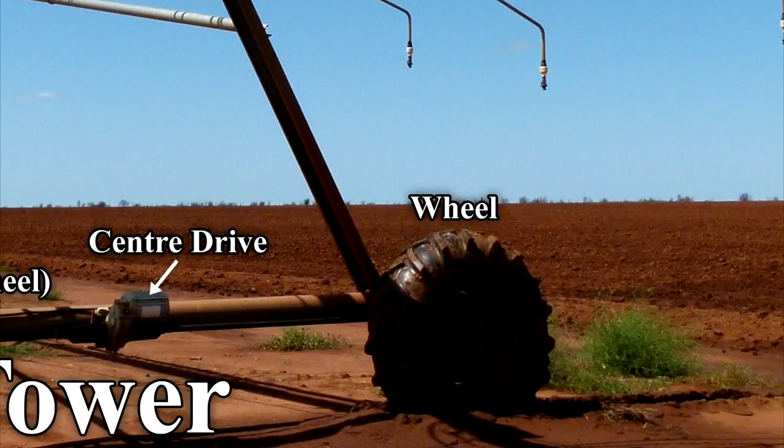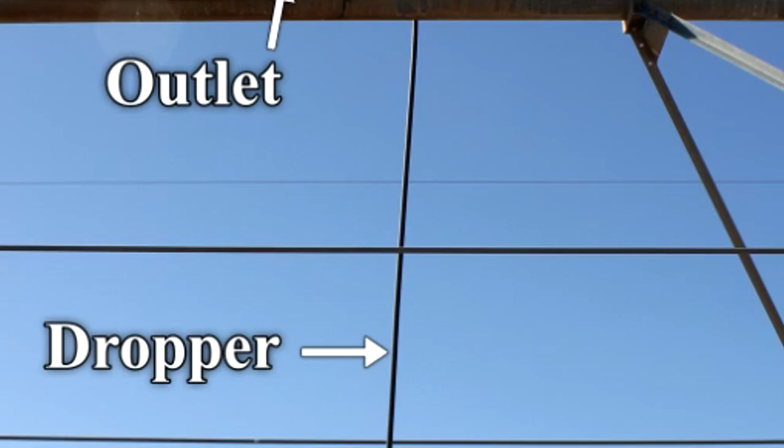The tower contains gearboxes, drive wheels and the drive motor, either hydraulic or electric. Flexible mechanical or hydraulic couplings connect individual spans, with system alignment maintained by micro switches, alignment valves and control equipment. Outlets or sockets along each main pipe allow emitters to be attached, either directly or more commonly on rigid or flexible droppers.

We now introduce Pat Daly, an irrigation consultant from the Darling Downs, who will give a detailed explanation on the componentry of the centre pivot.

Basically, with a centre pivot system, as the name suggests, you've got a centre pivot tower, and these towers can be made up of towable towers or skid, both in a skid tow arrangement or a wheel tow arrangement, and they come in a four-wheel tow or two-wheel.

And with the pivots, generally they are fixed pivot towers, and they can be run on commercial power or generated power on site. The tower itself is made up of...

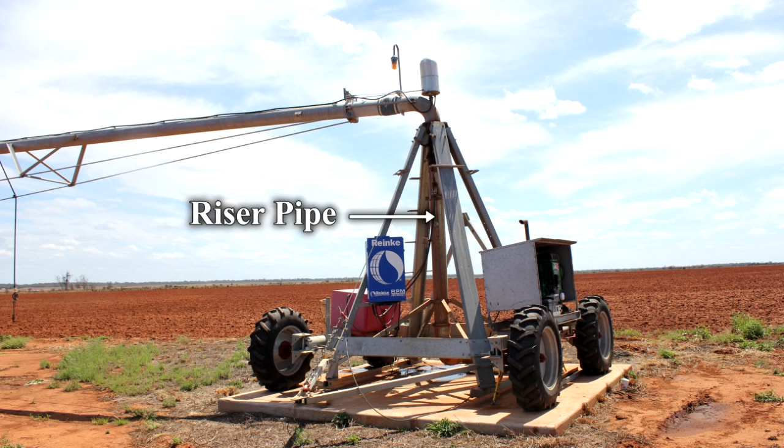Four legs generally, and it'll have a riser pipe that goes up the centre of the tower, which attaches to a pivot elbow. Through the centre of that riser pipe is what we call a J-pipe, which is really the conduit for the electrical cable to feed up through the inside of that pipe.

At the top of the elbow, we've got some of the start of the electrical components, which is a collector ring. The collector ring is the part where all the wires join into a circular box that only works on brushes and contacts. This allows the pivot to do a full circle without twisting all the wires.

Also attached to that pivot tower is the control panel. Control panels come in variable technology, like from the very basic machine where you can control the percentage that the outside tower is walking at, that's a percentage of the speed, down up to the very high-tech ones where you can vary the speeds and change the rate that it walks at various parts of the paddock.

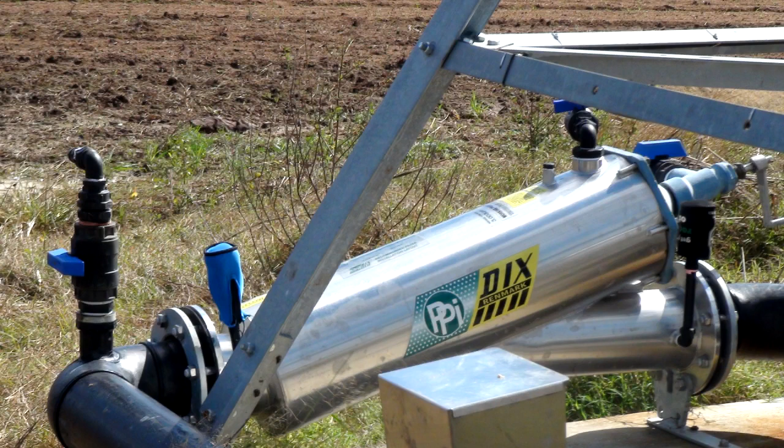The other component that you should have on a machine, particularly if it's using surface water, is a filter. The filter is best placed at the centre point. There's not very much point putting the filter back at the pump. The reason being, if there's anything in the pipe or there's any work that needs to go on with the pipe, you run the risk of putting dirt through the sprinklers.

All pivots, new pivots, are all getting filters put on them. We started off with very simple filters at the pivots or the pumps, and now we're going to a rotating filter that a man can just go up, and each of the filters have got a pressure gauge on the intake side and discharge side, and as soon as there's a differential you just have to wind the handle around a couple of times and drain it away.

The cost of your filters for us has been paid for in 12 months just on your labour. You save from having blocked jets or non-uniformity of distribution.

All of the pivots, we put the sand trap on the last tower, we lower that down to, with a piece of polypipe, down to just at the wheels, and we can crack a 2-inch plastic valve there and just drain that every time. And we also drop another drain at the very end of the overhang, so that we can drain the overhang out as well. And if you keep it clean out like that, you don't have a problem.

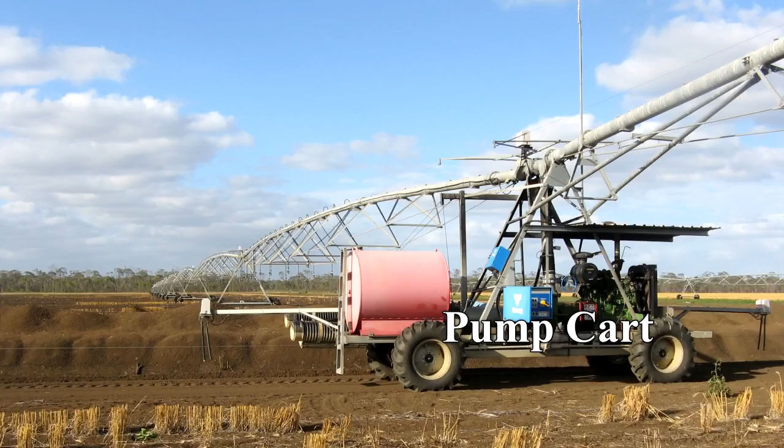A lateral move is used to irrigate rectangular fields. The main structure and components are a pump cart supplying water and power, self-supporting frame spans, each end of a span supported by a tower.

The tower contains gearboxes, drive wheels and the drive motor, either hydraulic or electric. Flexible mechanical or hydraulic couplings connect individual spans. System alignment is maintained by micro switches, alignment valves and control equipment. Outlets or sockets along each main pipe allow emitters to be attached, either directly or more commonly on rigid or flexible droppers.

We now introduce Pat Daly, a consultant from the Darling Downs, who will give a detailed explanation on the componentry of a lateral move. The lateral moves come in a couple of different configurations. You can get a 2-wheel cart or 4-wheel cart. It can drag a hose, a soft hose or a hard hose.

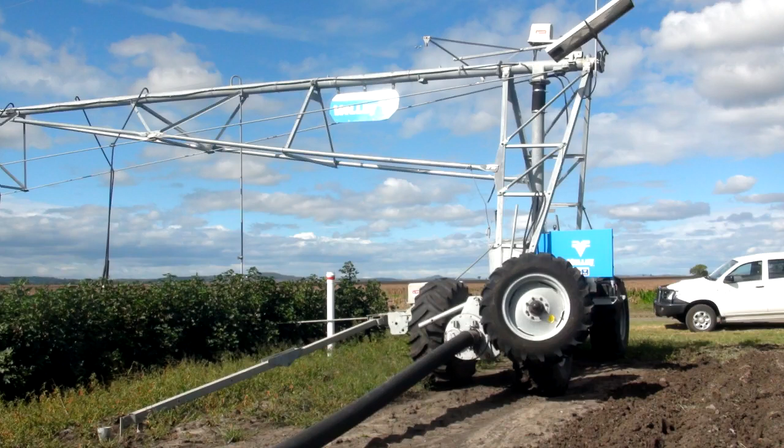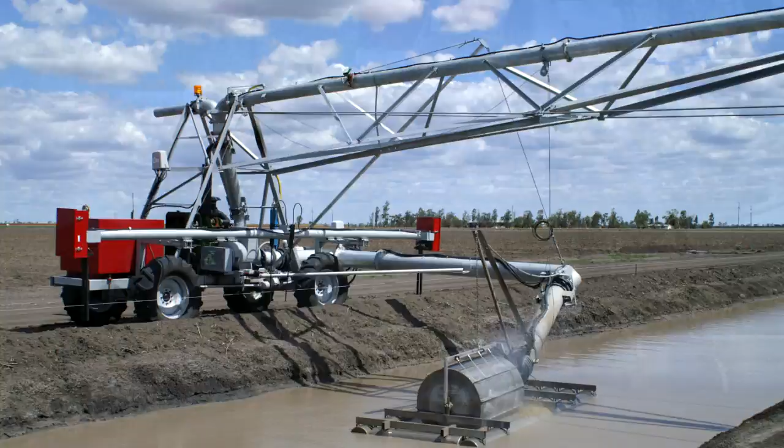The hard hose has the benefit of being able to pull more hose because it's got less resistance on the ground. There's also the ability for a ditch feed, where the machine draws water from a ditch. In these cases, the cart is mounted not only with an engine to generate power, but also to run a pump off one end of the engine that pumps water from the ditch.

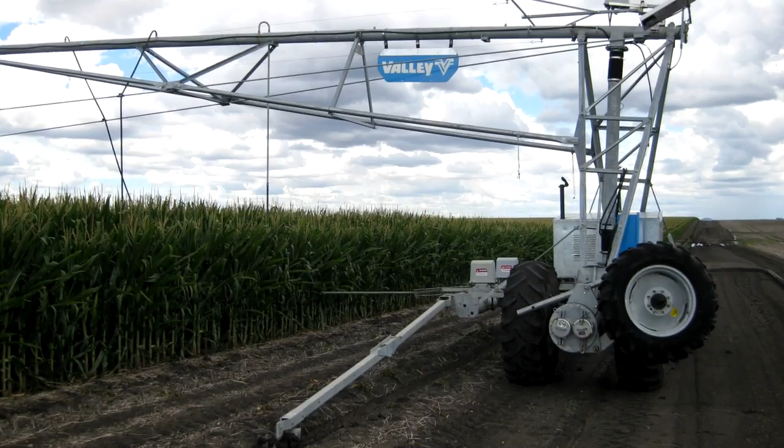The guidance systems in these cases can vary. You've got furrow guidance, which is basically a long arm in both the forward and reverse direction of the cart, which activates a micro switch to keep the cart square to the paddock that you're irrigating.

Or you can have a wire guidance. This is where you've got a wire just about 450 mil above ground level, and the arms do the same thing, with a micro switch in the forward and reverse direction to keep the cart square.

This is also particularly the case where you might have a pivoting lateral, sometimes referred to as a racetrack configuration. In this case, on the centre elbow you would have a proximity switch, which also helps keep the cart square with the rest of the machine when it's in lateral motion.

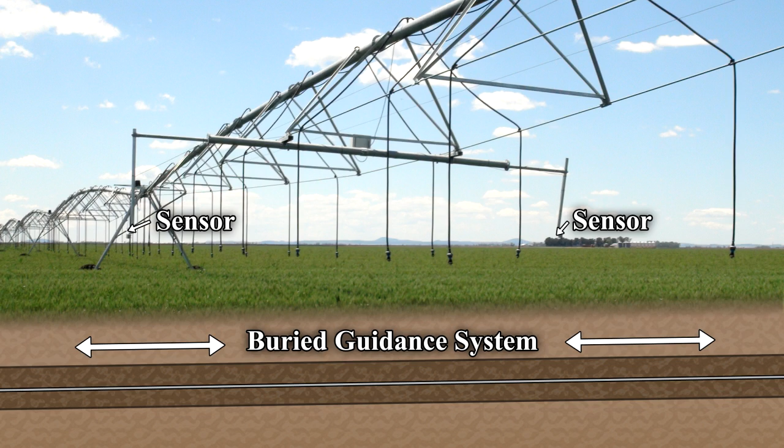The other guidance system is a buried wire, where a sensor picks up a wire buried beneath the ground. It works the same way, except the wire is all buried, and it's very sensitive to any change in direction. It's sometimes used where there are slight bends to overcome.

However, I wouldn't recommend it for that reason, because it can change the uniformity in the way that the water is applied.

The other way that's been used more often recently is GPS, where you've got a GPS reference of both the cart and the end tower. I'm not sure whether that's been used in a racetrack configuration, but if it hasn't been, I'm sure it's not far away.

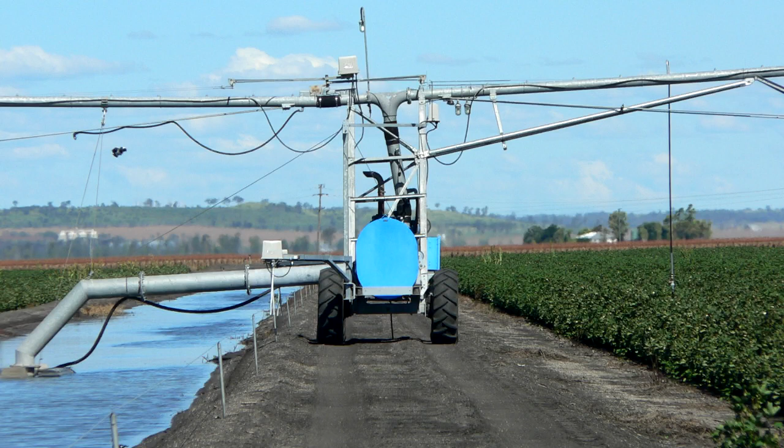By far the most intrusive to any farming operation is the wire guidance, because it's in the way of any farming activities that you might want to do across that laneway.

So we've gone for the underground wire guidance system, the same wire between both machines. The reason we went with it is because we wanted to just put it in the ground and forget about it. We'd seen other people's systems collapse over time, or on the side of the channel get flooded over, which was a bit of a concern.

We're also taken by the accuracy of the underground wire. I think we're very impressed with the accuracy we're getting. It's 700 under the ground.

It was a bit of a challenge to get it in. We had a trench put in with GPS, then we just put the tractor over the trench on a GPS line, had a rig, and laid it down. It was quite challenging because it was the very wet season when we put it in, but once it's in under the ground, we've been really happy with it. It's been great.

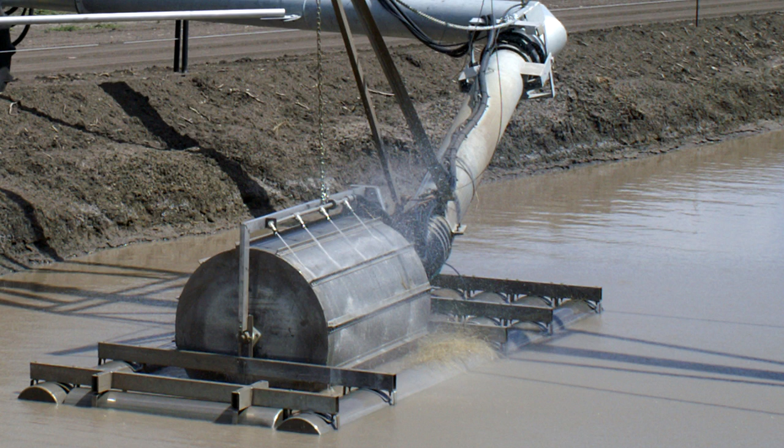The suction screens are generally set up so that you've got backflush water that can blow back across the screen to clean them, because there is a lot of trash, shells, frogs and fish and things that get in these drains and need to be cleaned off the screen.

However, they're not designed for that. The two ways that most times are used to prime the pumps on the carts is a vacuum pump, which, once the suction pipe is dropped in the water, will lift the water to the pump. Or alternatively, you can use an exhaust venturi, which causes a vacuum and lifts the water into the pump.

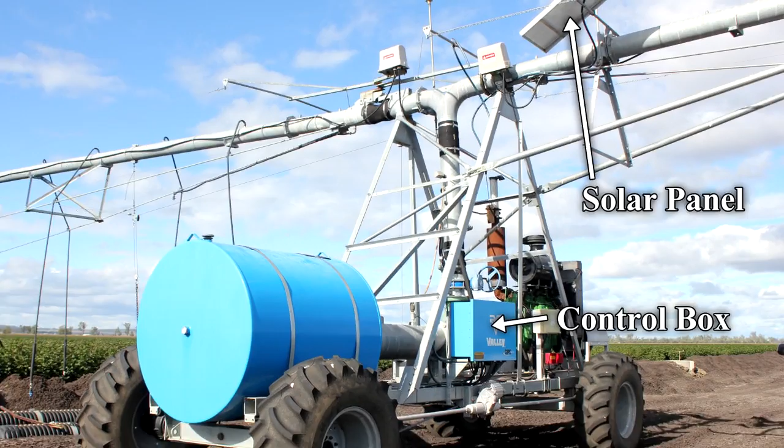The controls are generally all on the cart, and despite these being engine drive, they can be automated quite successfully. Generally they would have a solar panel to keep the control panel alive for any remote signals that it might get.

From the elbow there, the cable is run out onto the spans, and each of those spans are joined with a flexible joint. There's mainly two different types of joins that do this: a rubber boot, or you can get a split case coupling. Both of them are just there to seal the water, it's not anything structural to hold those spans.

Different brands have got a different way of joining those spans. We have a ball and socket type arrangement, which goes from the fixed pipe to the receiver. We've got some horizontal and vertical connections that allow free movement between the spans, but hold the receiver up to the stationary span.

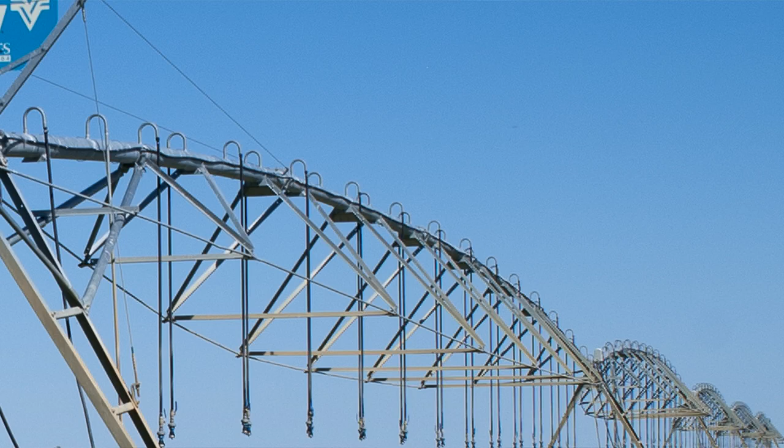Each of the spans are designed to take weight with a downwards pressure, and that's why if you see any of them, they've got a slight bow in the pipe, and they're all the structure underneath, which is the truss rods and V-jacks. The V-jacks are really the part that supports everything back to those truss rods and keeps the truss rods taut.

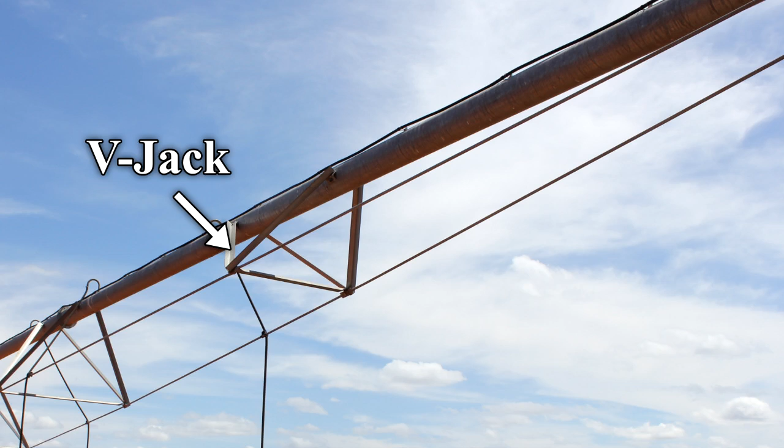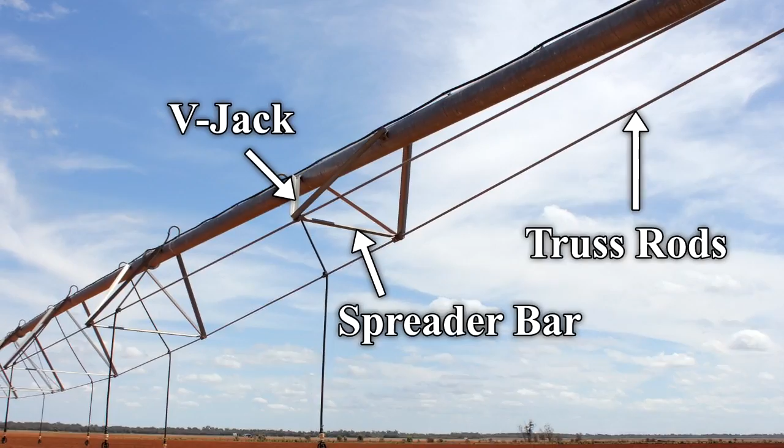Between those V-jacks we have a spreader bar that holds the V-jacks out into an angular configuration, which gives it more strength, not only with the downward pressure but also if there's any undulation that the spans might have to ride over.

At the end of each span there's a couple of different ways of attaching the legs to the base beams. There's a double leg arrangement, and there's also a couple of brands that use a single leg that comes off a gusset that's welded onto the end of the last pipe of the span.

Just on the spans, those spans are made up of short lengths of pipe which are bolted together with flange joints, with each flange joint having a V-jack and spreader bar to support it.

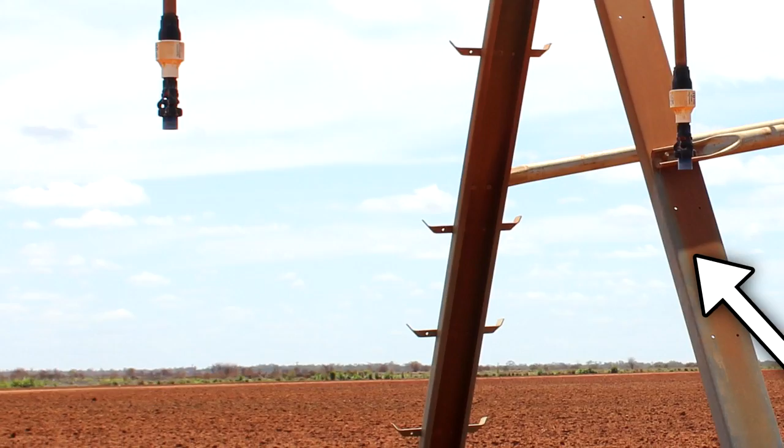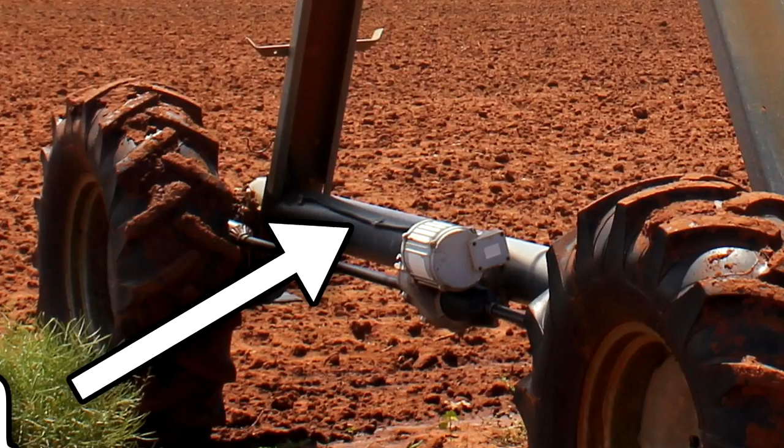But when it attaches the legs, the common thing with all of them is those legs are attached to what we call a base beam, and the base beam is really what carries all the drive train mechanism. So that's your centre drive in the case of an electric machine, and then your wheel gearboxes and wheels, drive shafts and couplings. With a hydraulic machine, of course, you don't have a centre drive.

You've just got wheel boxes that have got hydraulic motors on them. The other thing a little different with a hydraulic machine is that you will have hydraulic pipes that run from the centre point out to each of those wheels, and at each joint you will have a proportional valve, or a spool valve as it's commonly known, that will control the flow of oil to each of those motors to stop or control how much oil is going to the motors.

Obviously, the further out you get with a centre pivot, the faster the outside wheels have got to go, because it's got to travel further.

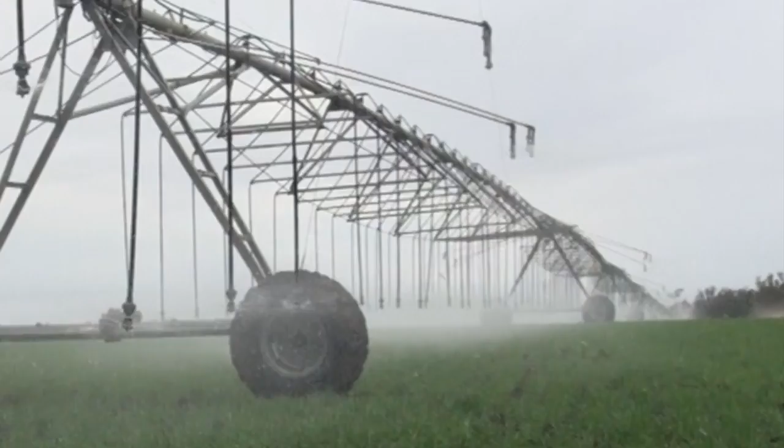With an electric machine, they work on a micro switch up on the tower, and really how this works is when the outside span gets out of alignment, it activates a switch, which then activates that set of wheels. The wheels will travel forward until the micro switch is switched off. There's a few different ways of doing that, but basically they're all using the same micro switch.

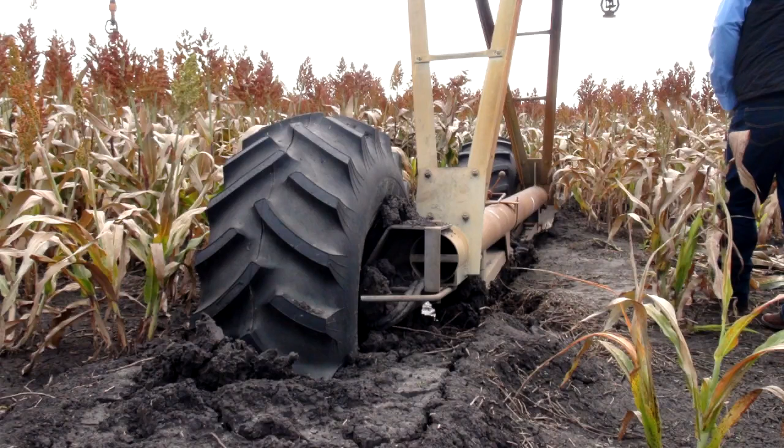They also have an override switch. If it gets out of alignment too far, that will shut the machine down. This could happen if you had a machine bogged at some stage and it can't keep up with the next tower, well, it'll stop the machine.

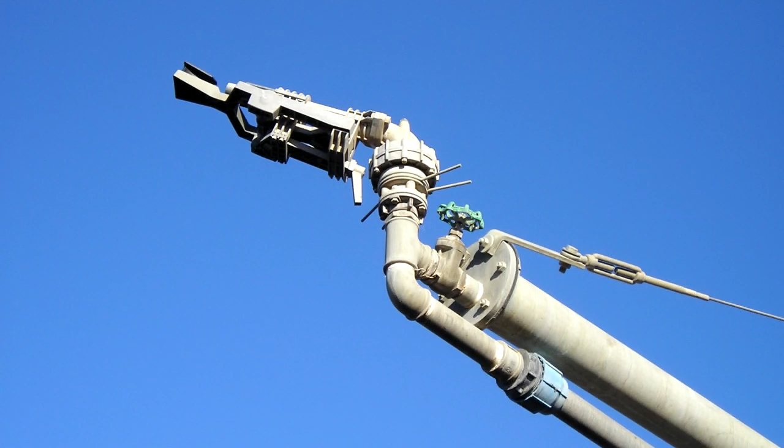The cable runs all the way from the collector ring right to the last set of wheels, and quite often if it does have an end gun on it, that cable will also supply power to a booster pump. The reason for the booster pump is that centre pivots are low pressure machines, and the end gun is a high pressure piece of equipment, so it needs to have the pressure boosted, and this pump is supplied out on the end tower to supply that end gun.

The end guns have a part circle function on them, and normally that's adjusted around the 210 degrees.

So that's done at commissioning generally.

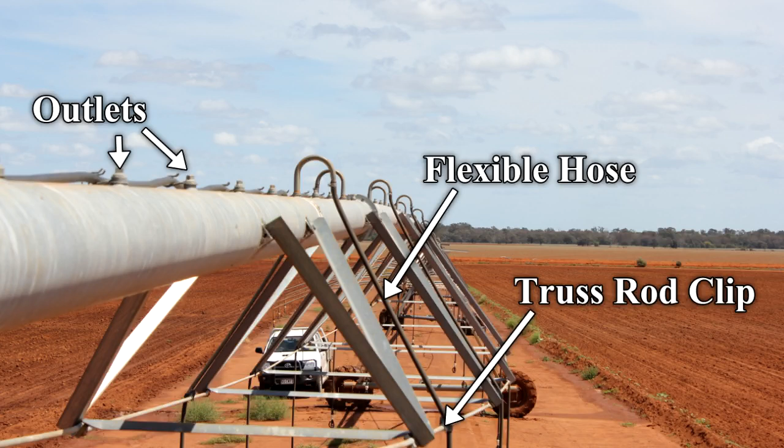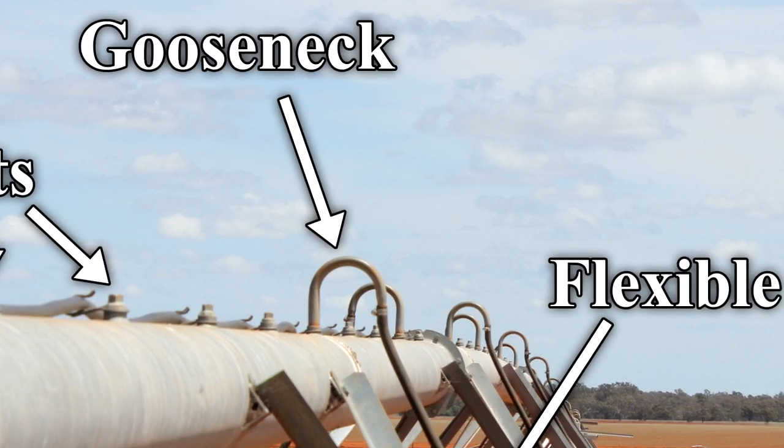The other parts, moving back over the machine, it's made up of each of the sprays having what we call a gooseneck, and that gooseneck comes in a couple of configurations: galvanised steel, PVC, and also with the polyline machines uses the hose straight out of the top of the span pipe. Each of these goosenecks has a hose, either a rigid poly riser, or sometimes with old machines it's galvanised steel pipe, or PVC, and also flexible hose.

Recent times, flexible hose has been the main one used, and each system has a unique sprinkler pack design which gives you a certain ground clearance with a particular model spray to suit the application. The different sprays available are basically a rotator, a spinner, a static plate, and a LEPA system, and each of these has its own application.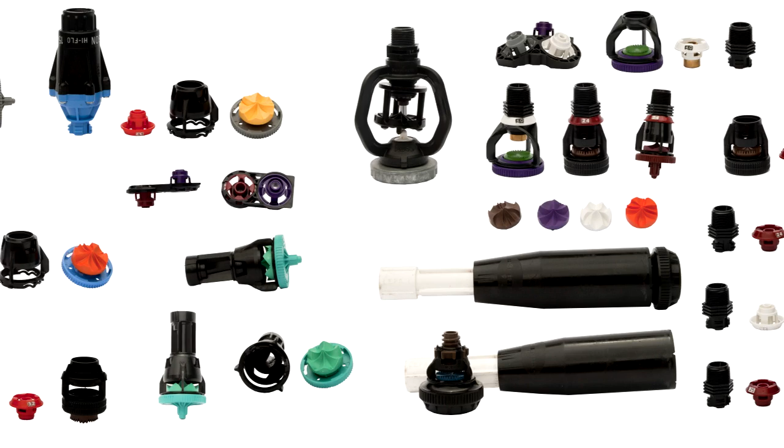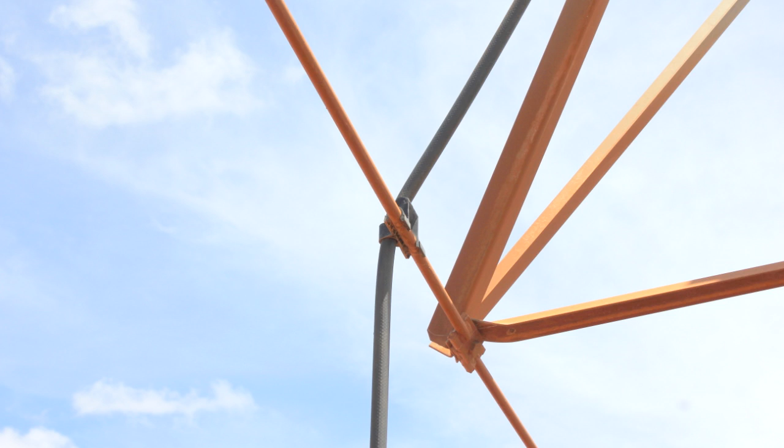They also generally use, almost always now, a pressure regulator, and those pressure regulators range from 6 psi to 20 psi. You can get things like truss rod clips to raise the ground clearance of the sprays. For example, you might have a corn crop one part of the season and another season a lucerne crop, and you might want to change the sprinkler heights. This should be done in conjunction with the sprinkler chart when it's been produced at the factory.

The truss rod clips, yeah, we use them. We have what we call our standard machine, and we put them on all our machines. Basically, it spreads the area in which you're wetting. Again, it helps with your management because it helps with your infiltration rate. So you're able to, again, it may be a reason that you don't need to go to 15 psi regulators.

You can go to 10 psi and use truss rod clips. It just spreads your water. So again, you can probably put more water on in a pass because it's increasing your application, your infiltration rate. We just think they're very cheap. It adds probably 25% to the amount of water you can put on in a pass. Certainly with spinners, we've found that.

No, to us, they're just a standard thing. Again, we'd put them on. There's no real disadvantage. The only one could be how much evaporation you're going to get from having a larger wetted area. But if you could put more water on, then you're going to get less evaporation, that's one of the theories, if you can put more water on in each application. But we just use them as standard because of the ease of management, and that's a critical factor. Management is a big thing with these machines, and making management easier and reducing labour commitments is one of the key drivers for the success of these machines.

However, there is another boom back arrangement where the sprays used run both front and back of the machine, putting out a full circle spray. This has the effect of giving a bigger wetted footprint and eliminating water pooling.

Every one of our pivots has got boom backs, so we don't put a pivot in without boom backs. Our part circle pivots all have double boom backs so that we can control them with valves. For the onion growers on the smaller pivots we're putting in for them now, we're putting dual boom backs so that they can farm sectors of the pivot and come back over it watering both ways.

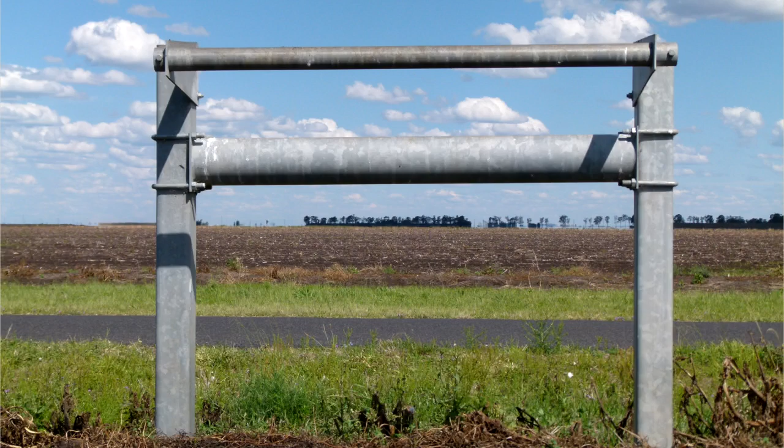You may want barrier stops out in the field. This can be to stop a machine, or it could simply be to reverse a machine if you've got a system where it goes so far and you want it to walk backwards. Barrier stops can be made up of a fixed barrier stop or a portable barrier stop, and they simply activate a switch out on whichever tower suits best. It doesn't always need to be the last tower.

The other area this can also happen is back at the collector ring. However, most times this area is only used for the provision to stop and start an end gun. Even if you were to stop and start the machine from out at the centre point, it would always be advisable to still have an infield stop.

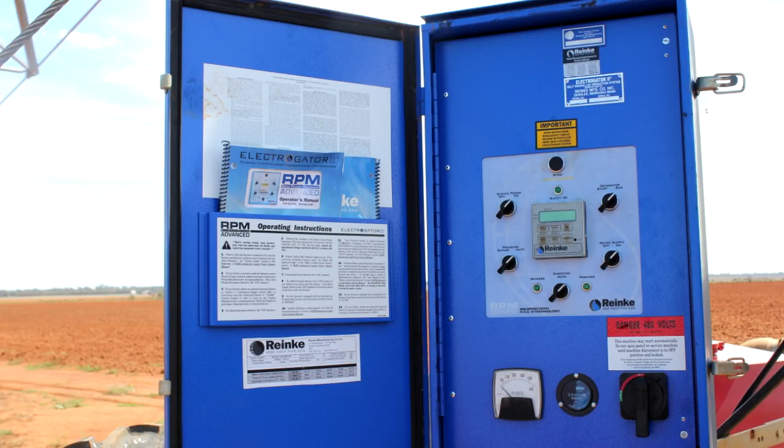Control panels have got a lot of features that may not always be used, but one that all of them have is to stop and start a pump from the pivot. You can have the pivot or pump shut down via a valve, which closes off when the pivot's got to the desired area in the field and raises the pressure in the main line to shut the pump off.

The machines themselves come in different span lengths and also different pipe sizes and different pipe materials. In the materials, we've got galvanised steel, polyline machines, aluminium machines, stainless steel machines, and chromium nickel machines.

With the galvanised machines, they're normally the ones that would be polylined. There's not very many stainless machines and aluminium machines, but they do have their place in the market. The other thing that varies is pipe sizes.

So we have pipe sizes from 4-inch, 6-inch, 6 5/8, 8-inch, 8 5/8, and 10-inch. The reason why these are referred to in imperial measurements is that's the way they're built in the US, where most of the pipes are built.

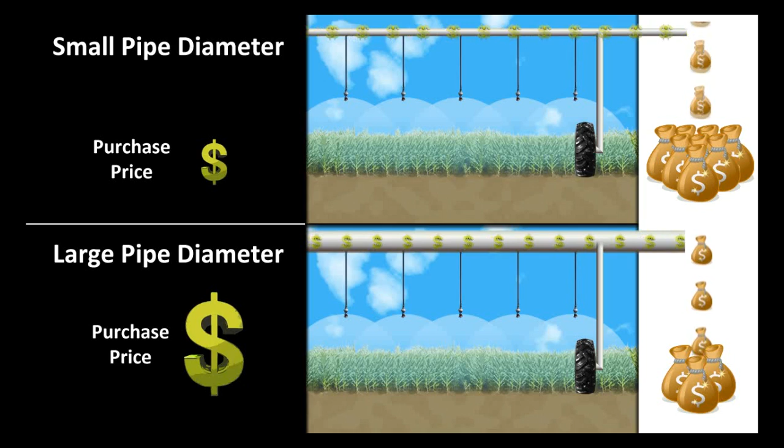Choice of pipe diameter can significantly affect operating costs. Smaller pipes result in greater friction loss and more energy consumption. On longer machines, inner spans have a larger diameter pipe compared with outer spans. This telescoping of different pipe diameters is used to balance capital and operating costs.

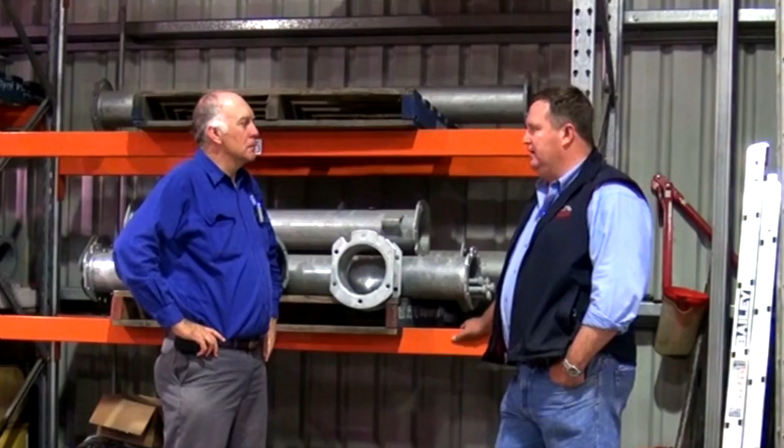The size of the pipe will determine the friction loss in the machine, and the greater the friction loss, the more energy - so your running costs, you need to lower your friction losses as much as you can. Especially on pivots where some people are trying to go bigger than 100 hectare circles, trying to do 12 mils a day, you've really got to move a lot of water because the big acres are the furthest away from where the water is entering the machine.

So normally you would telescope the size of the pipe down. As you move out along the machine, the pipe can get smaller. The biggest pipes you can do are like 10-inch, then you can go down to 8 5/8, 8-inch, 6 5/8, and so on. Your overhang pipes are even smaller. The person selling your machine should be able to do that on your sprinkler chart.

It should bring up your resistance. Any of the design programs you're using for your machine will be able to calculate for you a friction loss in the machine and the head required to operate the machine. So it's a critical part.

It's one of the areas where people need to compare apples with apples, because quite often people will cheat on the running cost by giving you one less span of a bigger pipe because it's cheaper, just trying to win the market on price. So that's just one of the issues you really want to look at.

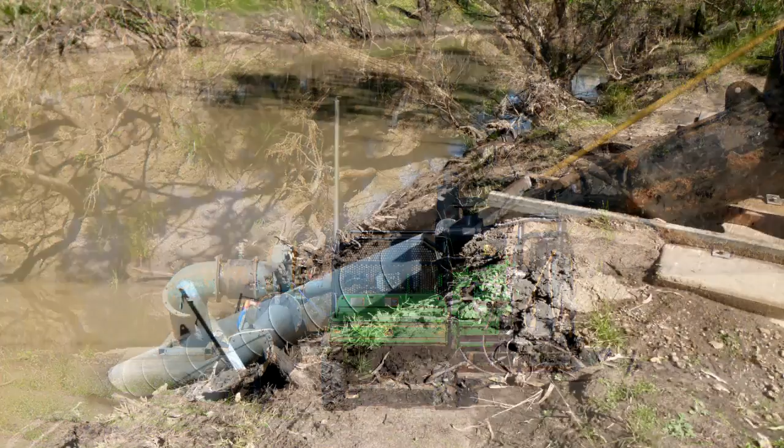Pipeline valves are installed to control the amount of flow or to protect the pipeline. A flow control valve should be installed in the pipeline near the pump for each water source. For the most efficient operation, the control valve should be fully open once the pipeline is up to pressure. Pumping against a partially closed valve causes a pressure drop, which wastes energy and increases operating costs.

Check valves are placed between the pump and the pipeline to prevent backflow after shutdown. This minimises the risk of damage to the pump. Flushing valves on the end of the centre pivot remove sediment and trash that can block sprinklers.

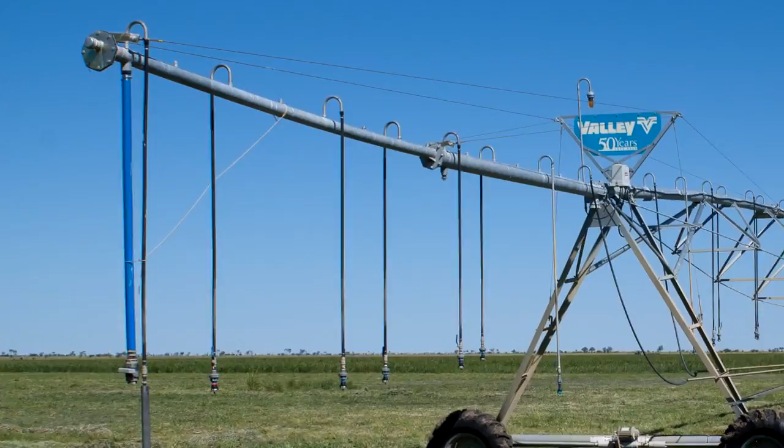Wheel rutting is reduced by fitting larger wheels and tyres. Using lowest recommended tyre pressures will also assist. However, larger wheels and tyres increase the load on the gearboxes and drivetrains, which can result in premature failure.

Existing ruts should be filled in before fitting larger wheels and tyres, as the larger tyre will tend to deform and widen the rut, placing greater stress on the drivetrain.

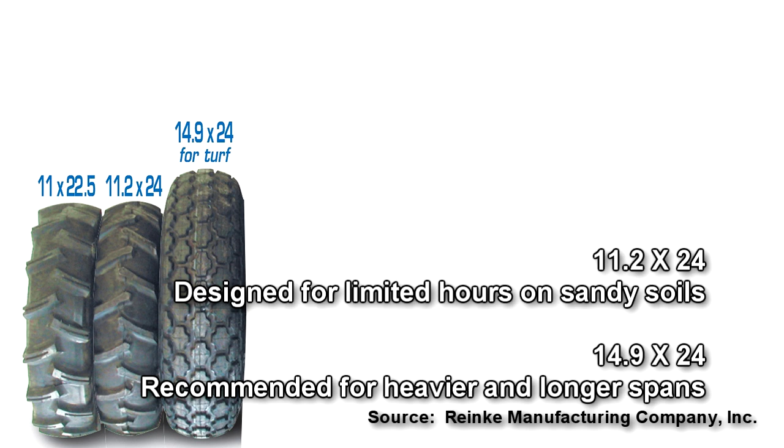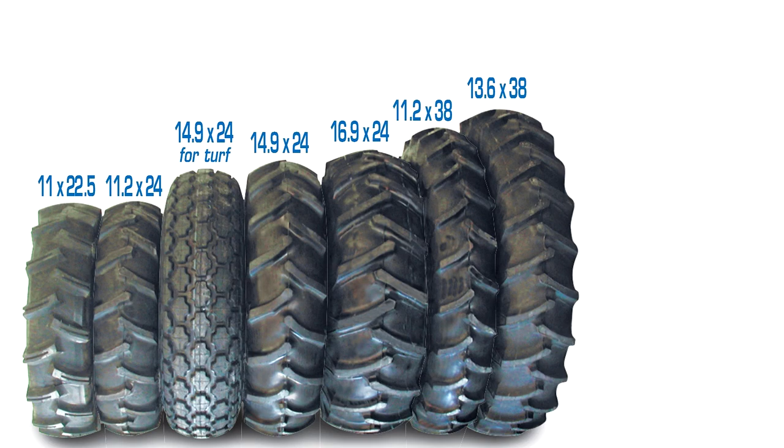A wheel and tyre size larger than the standard 14.9 inch by 24 inch can be specified when ordering a new machine. Other wheel sizes available include 16.9 inch by 24 inch, 16.9 inch by 28 inch, and 11.2 inch by 38 inch. Two wheel configurations are most commonly used in Australia, however other configurations are available from manufacturers.

We chose the option of the larger size tyre, this being a 16.9 24, and for just a little bit of extra cost involved, we thought that was another advantage to reduce any wheel rutting and do a better job, as well as giving a bit more traction, I guess, too.

So for just a bit of extra cost, we thought it was a worthwhile thing to do.

There are basically two standard types of boxes, whether you have a towable gearbox or an untowed gearbox. That's something you really need to think about early on in the design of the machine. Is this a machine you're likely to move from site to site? If so, you need to make the call early on that you want the towable gearbox.

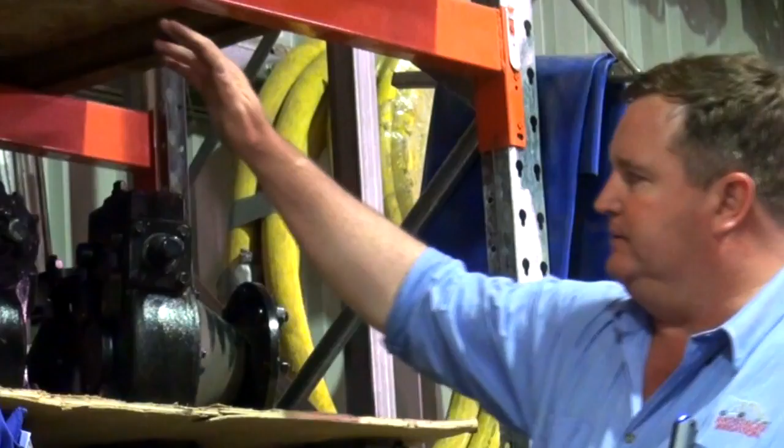The towable gearboxes are basically the same as the non-tow, except they've got a lever which disengages the gearbox and lets it freewheel. If you don't get that right at the start, you can't make these non-towable ones towable, so you'd have to go back and replace all the gearboxes. It's something you need to think about at the start.

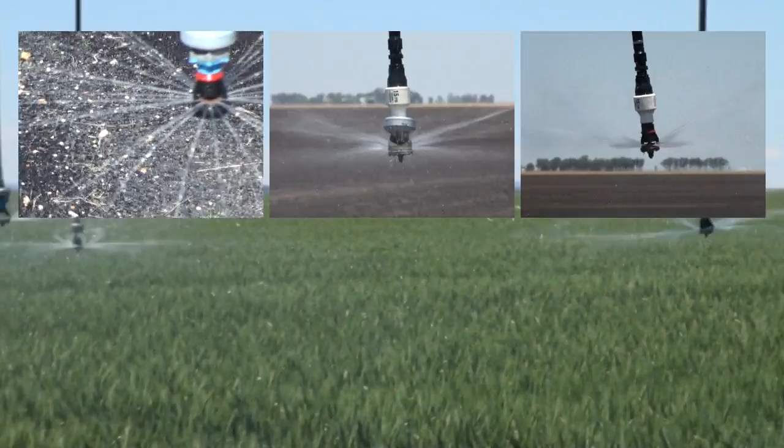There are two application methods: sprinkler and LEPA. The sprinkler types include static and moving plate. The moving plate sprinklers include spinner, rotator and wobbler types. LEPA systems comprise bubbler, drag hose and drag sock configurations. Some emitters can be used in both sprinkler and LEPA modes.

The static plate sprinkler is cheaper than the other types, but has generally poorer performance. There are only two companies manufacturing these sprinklers, Nelson and Senninger.

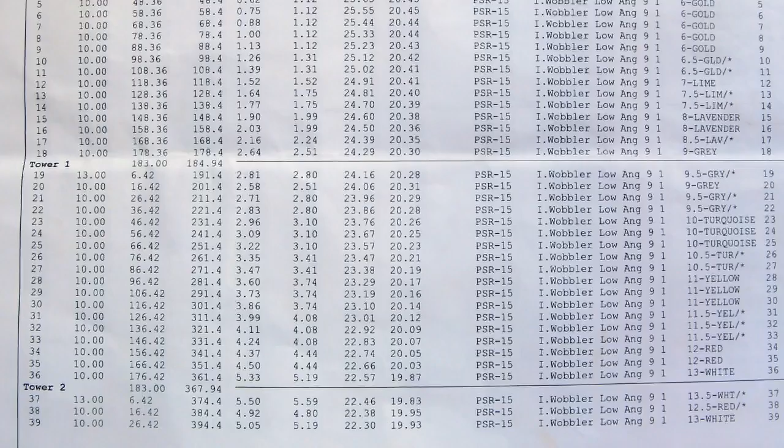Each machine has its own unique sprinkler pack. This pack describes the spacing, location, height, regulator, discharge rate, sprinkler model, plate and nozzle size. The sprinklers, nozzles and pressure regulators along the length of the machine are referred to as the sprinkler pack.

They represent about 7 to 11% of the capital cost of a machine, but are responsible for 70% of the irrigation performance of a machine. The aim of the sprinkler pack is to apply water uniformly to the field and maximise infiltration.

Modern sprinkler packs are designed to operate at low operating pressure to minimise operating cost. Sprinkler packs using 6, 10 and 15 psi pressures are available.

There are two main types of emitters: static plate and moving plate. Static plates can be single, double or triple with no moving parts, wear slowly and operate at low pressures.

There are three types of moving plate emitters. Spinners have a fast rotation and operate at low pressures. Rotators rotate slower than spinners and require higher pressures to operate. Wobblers are medium to low pressure emitters which produce an even distribution pattern.

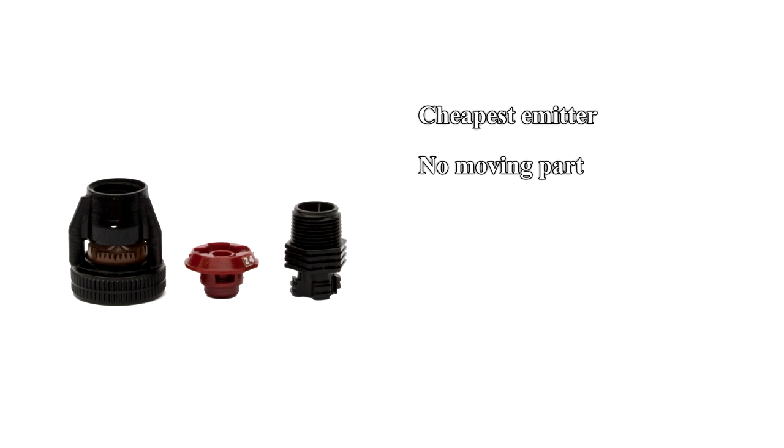With a static plate, the water comes down vertically through the centre of the assembly, through the nozzle, and strikes a fixed plate in the centre. The water stream is forced into the grooves on the plate and distributed as individual horizontal streams. There is no rotation of the individual streams.

Flexible droppers allow some movement of the sprinkler head. There are a range of plate types with differing numbers of grooves and groove trajectory. Under still conditions, the throw diameter ranges from 4.9 to 12.2 metres, depending on the sprinkler height and operating pressure.

These are the cheapest emitters available and have no moving parts. Uniformity can be compromised, particularly under windy conditions and low pressure. It can be converted to a LEPA system using either a hose drag adapter or using the bubbler clip.

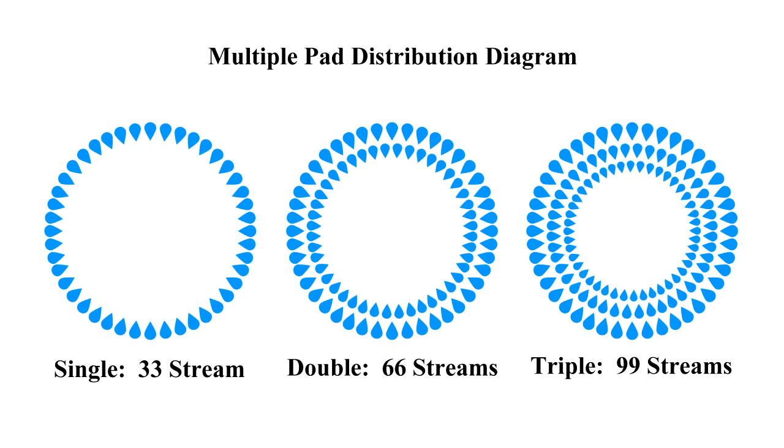They are available in single, double and triple plate configurations. The aim of the multiple plates is to improve water distribution from the sprinkler and reduce water impact on the soil. An issue is trash collecting where multiple plates are used.

The old one we see a bit of, and I've only sold one set in 8 years because eventually we've been able to talk the grower around, is the old D3000, the static plate. They've got a number of issues, and that's why the industry's moved on, just with uniformity and the ability to get good even coverage, as growers would understand.

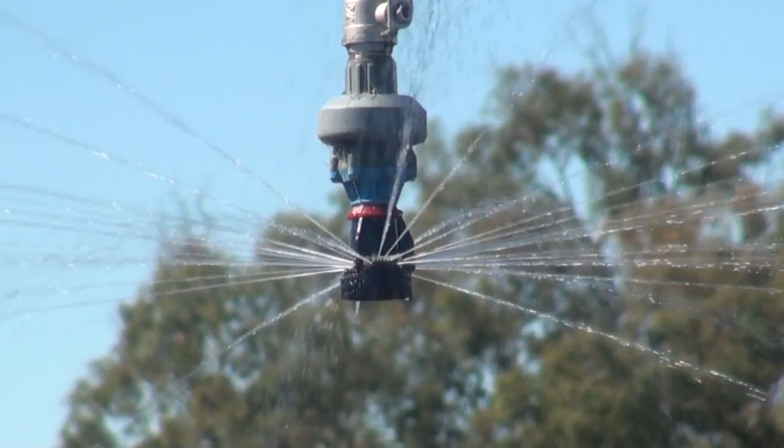Many of the original pivots and laterals that came out in the first influx, sort of in the 80s and before, had this type of sprinkler on them. They're now very old technology, and as I've said, I've only been forced to sell one machine that had these on it. They have more losses because of wind and evaporation, as the droplet size and uniformity is not good, and they have quite high kinetic energy impact where it's hitting the ground. So they're still used, but technology has moved on.

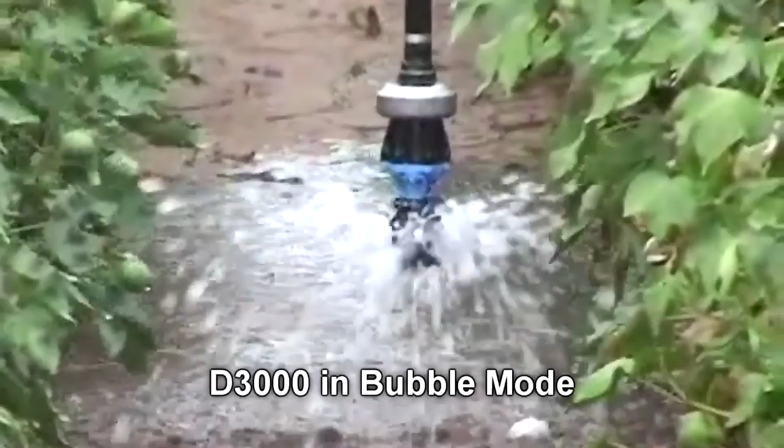The D3000 can be converted to LEPA application using either the bubbler clip or by attaching a LEPA sock using a hose drag adapter. A lot of people saw socks as a cheap way to turn a D3000 in the old days into a LEPA and actually put the water on the ground.

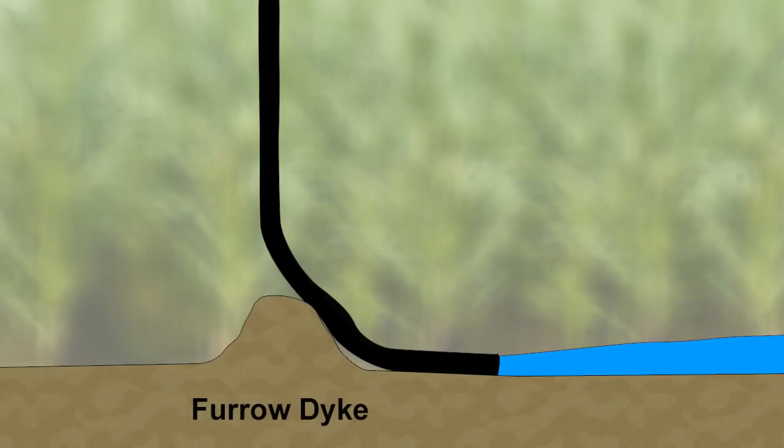We've actually had some issues with socks in that it makes the water application very narrow on the ground, and we've seen it cutting furrows and getting a constantly wet area. After several laps, you get this confined wet area and erosion, with the water actually running quicker when you use the socks. Some people have then gone to diking to try and slow that down, but that's sort of taken away their stubble or incorporated it, which we've tried to encourage a lot of our growers to go no-till under these machines.

With a spinner, the water comes down vertically through the centre of the assembly, through the nozzle, and strikes a quickly spinning plate in the centre. The water stream is forced into the grooves on the plate and distributed evenly across the wetted footprint.

It operates at higher pressure than static plates, usually between 10 and 20 psi. The spinning action produces a gentle, rain-like water pattern. It is specifically designed for more sensitive crops and soils, low instantaneous application rates and reduced droplet kinetic energy, minimising soil surface degradation. It provides high uniformity with better overlap and lower application rates compared to static plate emitters. Better choice than the static plate under windy conditions.

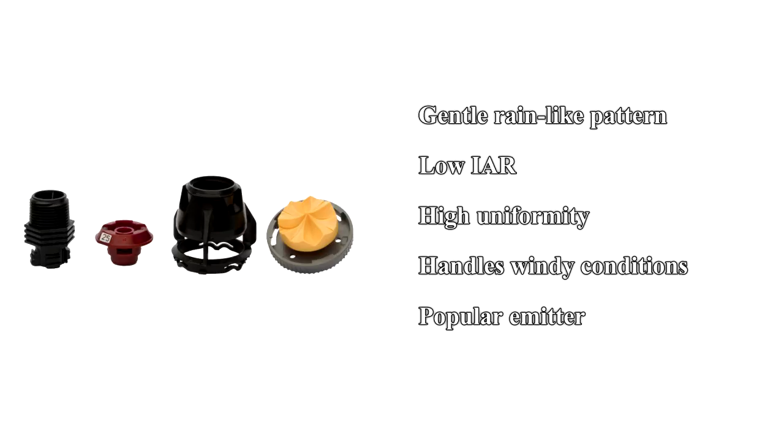These are a popular choice of emitter. There is a choice of plate types available, producing a spectrum of droplet sizes. There are fewer grooves compared to the static plate. The throw diameter ranges from 12.8 to 16.5 metres.

The most popular one we sell is the S3000 spinner. We find it's a good all-rounder, it's easy on the management, and it's got a very low impact on the soil and spreads over a wide area, especially if you use it on truss rod clips. We're selling our machines onto a lot of the black clays or the vertisols, and not an over amount of slope.

So yeah, that's by far our most popular. We'd probably do 80% of our machines that way.

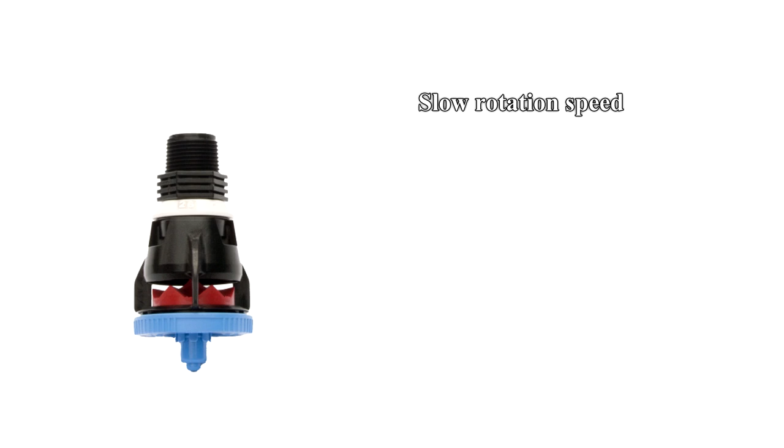With a rotator, the water comes down vertically through the centre of the assembly, through the nozzle, and strikes a rotating plate in the centre. A viscous silicone fluid in the rotor motor controls the rotation speed, resulting in a slower speed and more obvious streams of water compared to the spinner. The water stream is forced into the grooves on the plate and distributed evenly across the wetted footprint.

The rotator operates at higher pressure than the spinner, usually between 20 and 50 psi. This results in larger droplets compared to the spinner and obvious streamlets, which give this sprinkler better wind fighting capabilities. It is designed for a wide range of sprinkling and low irrigation intensity conditions and poorly drained soils.

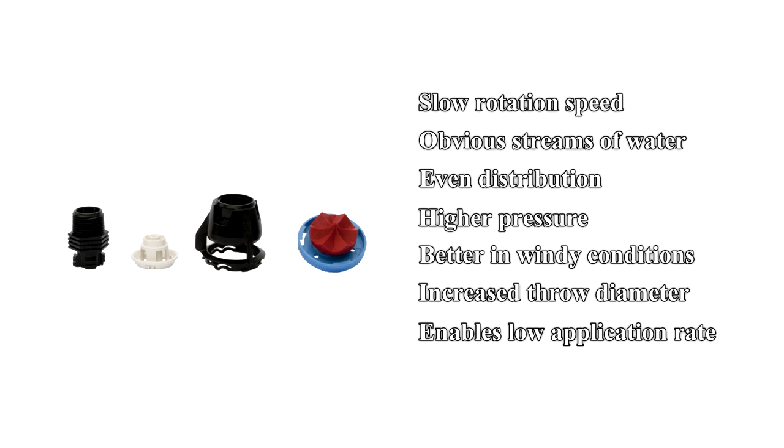There is a choice of plate types available, producing a different number of streams and spectrum of droplet sizes. It has a larger throw than the spinner, with a throw diameter ranging from 17.7 to 20.1 metres when installed at 1.8 metres height. It provides high uniformity with better overlap and lower application rates, and is one of the best under windy conditions. Probably our next most popular one that we sell is the rotator.

Again, it has the longest throw of virtually any sprinkler out of the Nelson range. We use it when infiltration rates are a real problem. So when we go on some sloping country or some very hard red country is when we use it. One of the issues we have with it is just how hard the water hits the ground. So again, it's that kinetic impact on the soil.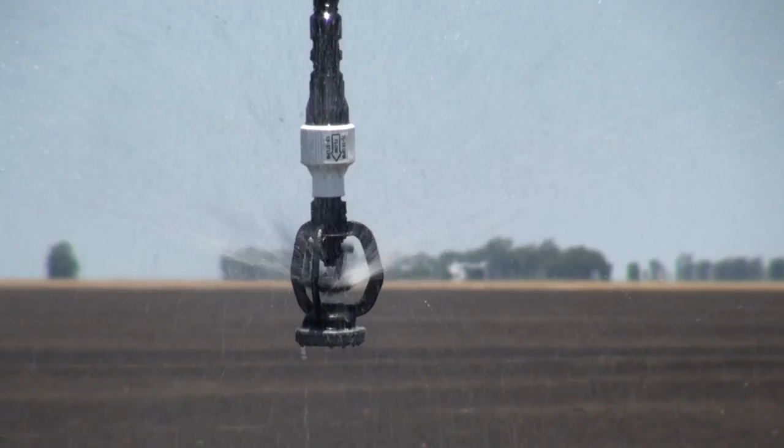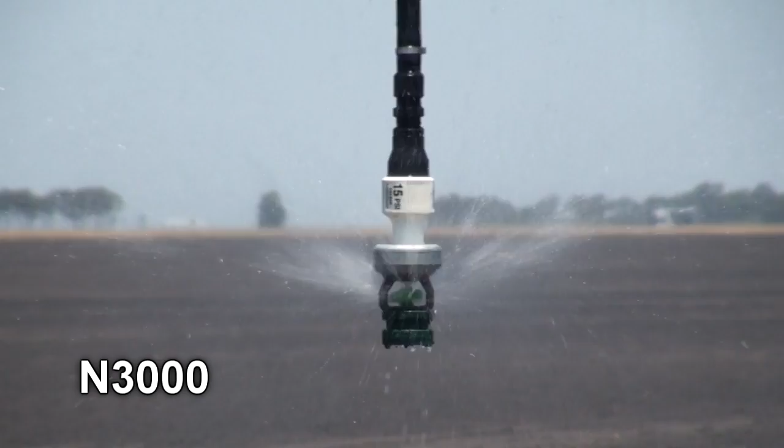Senninger produced the iWob, which operates at similar pressure to the spinner, usually between 10 and 20 psi, and with a throw diameter range of 10.4 to 13.4 metres at 1.8 metre height. Nelson make the N3000 Nutator, which operates between 10 and 15 psi, and has a throw diameter of 14.6 to 15.2 metres at 1.8 metres height.

The next one would be the Senninger iWob. Again, it's got a long throw. Again, it's got a big droplet, and I suppose all of those three are really making your management decisions easier and allowing more management mistakes as far as overwatering. And that's why we tend to use them. Plus, they're very efficient.

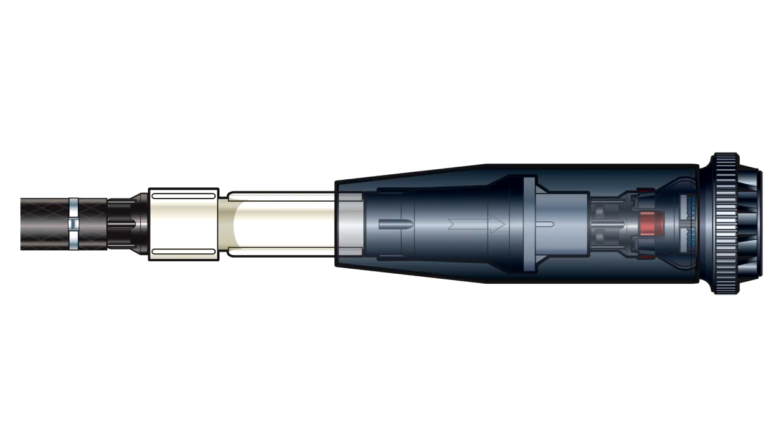The quad emitter is a Senninger product which can be used for low energy precision application, referred to as LEPA. The quad spray has 4 irrigation modes. These are bubble or LEPA 1 mode.

This applies water as a fan into the furrow between rows of plants, keeping the crop canopy dry. Aerated bubble or LEPA 2 mode drops water directly into the furrow.

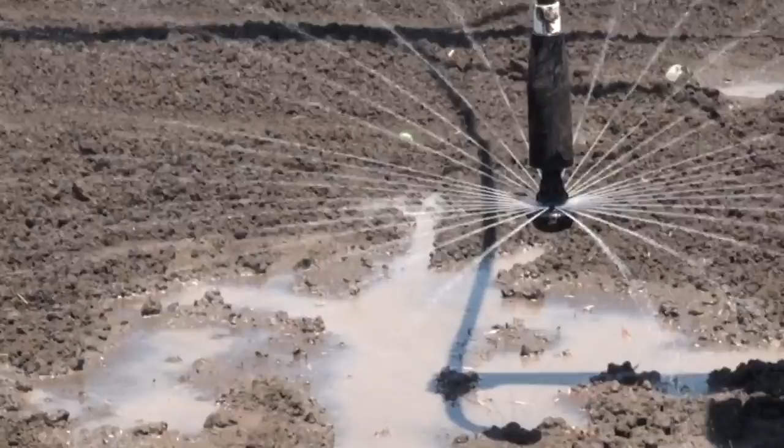Spray mode applies water in a similar way to a static plate sprinkler. This wets the entire soil surface and is used for crop germination and irrigating broadacre crops. Chemigation: water is sprayed upwards and is used to apply fertiliser and registered chemicals to crops. It can be used to wash away certain insects from beneath the crop canopy.

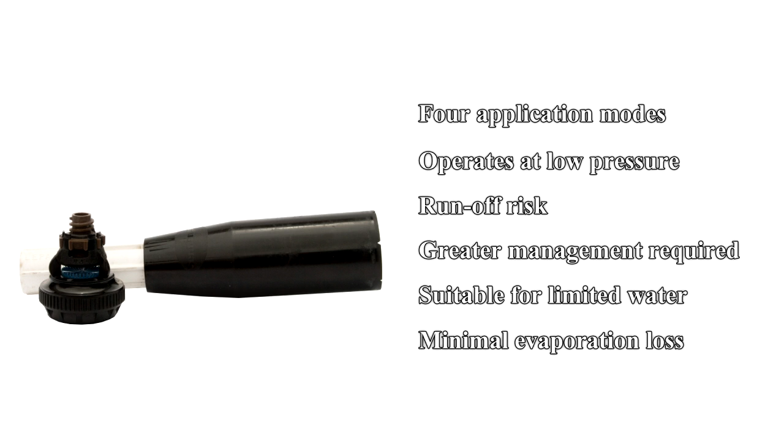The quad operates at low pressures of 6 to 10 psi. There is a runoff risk as water is applied to only a small footprint. This risk is minimised on cracking soils and through good management practices. These practices include furrow diking, stubble cover retention, and planting in a circle under centre pivots. These emitters are often used where there is limited water available in order to minimise evaporation losses.

Quad sprays done by Senninger, they're probably what we've seen as the best bubbler sprinkler. That's where you're putting the water on the ground, as most growers would understand it. They're very good, especially if you're on cracking country. Very difficult to use if you're on sloping country or country that doesn't crack.

But you can really use those when you have a machine which is probably under-spec'd for what is the perfect design, but you want to be very efficient, because you can actually use those to run the water down the cracks if your management's up to it. But they really do require a lot of management—I'd say probably 50% more management than the spinner, the IWOB, and the rotator.

This is the quad spray in the bubble mode. You can see it puts the water down over probably a 60 centimetre area, and it's very efficient at putting the water on the ground. We find it very effective if you've got cracking country.

So a lot of growers will go through and use a sprinkler, and then later in the season, as the ground starts to crack and the plants are using more water than they're able to apply, then they've got a real fit. This is a chemigation mode, and it really was used in the US.

They used it in corn for getting mites, and also in cotton, getting up under the leaves. We use it—some of our growers use it sometimes if they're applying foliar fertilisers late in the season, but really it's very rarely used.

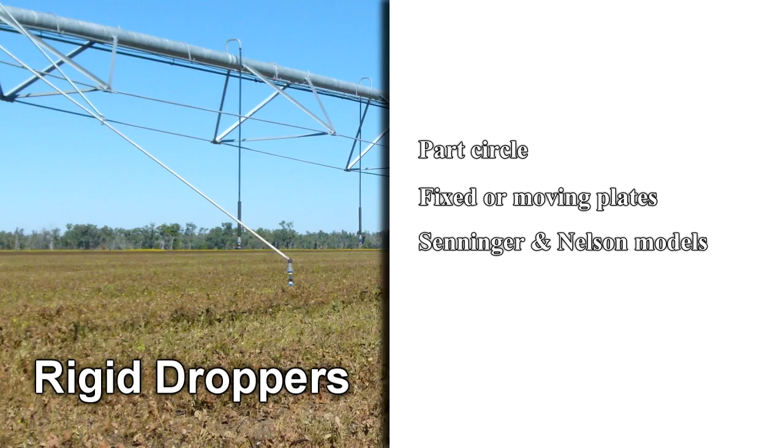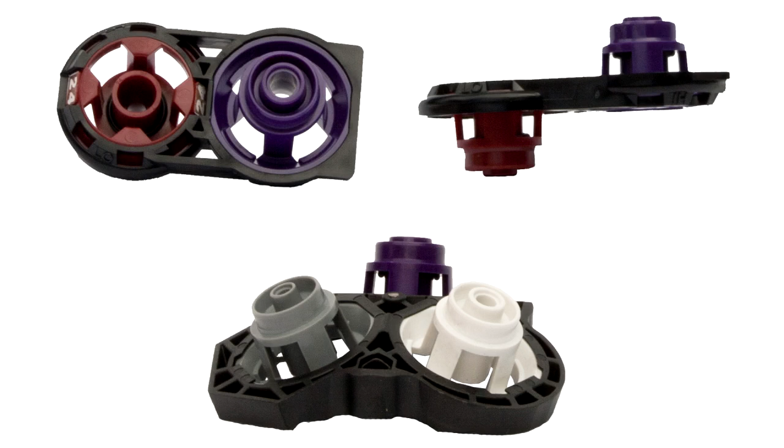These emitters are normally attached to the span by either boom backs, rigid droppers, or a stabilising bar between two part circles, which creates a more rigid structure. If using two water sources, for example from a bore and a storage, then the dual nozzle clip permits the grower to adapt the system flow rate to the water source being used.

This is a dual nozzle clip that's put out by Nelson, and it's got quite a number of uses. We have it where guys are coming off storages or out of bores and have two different flow rates, or they're coming from two different supplies. What it allows you to do is change the flow rate that the machine will put out. Now, some growers say, oh well, there's still water coming out, so I'm right.

I don't need to worry about it. Well, that's very, very incorrect. You probably can't be more incorrect if you tried.

The critical thing with laterals or centre pivots is you must get the uniformity of the water across the machine correct, otherwise you throw the whole machine out, and that's part of having pressure regulators. We've got several clients who pull out of a storage and others that pull out a bore with different flow rates. To change the flow rate of the machine, it's simply a matter of changing the nozzle, and you can have a high flow rate and a low flow rate.

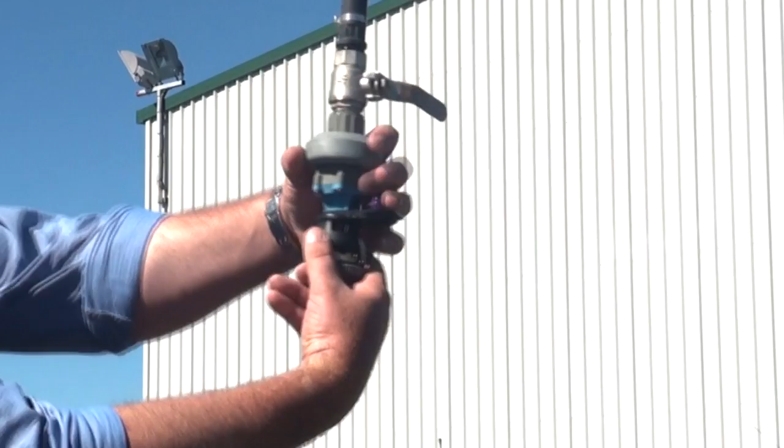The way to change it is basically you're unscrewing the spinner. This is your nozzle, it's got two different sizes. So to change it, you take it, turn it around, and simply screw it back on, so you don't have to actually go and have them stored somewhere else. Those two nozzles are set for this particular sprinkler, and they have that across the whole machine.

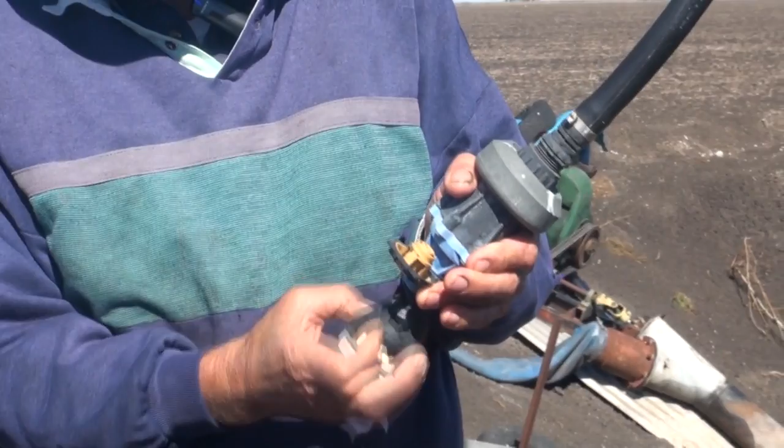It's a great idea. We even have some clients who on Lateral Moves have a machine that's geared up for 8 mils a day and 12 mils a day, and they use the 8 mil a day on their winter crop or for watering up their summer crop, and then for the peak period they'll turn it around and put their higher flow on, just so they don't have to run their machine at maximum capacity, so it just lowers their running costs. Again, this is when you start to use these machines as a management tool more than just a watering system.

Pressure regulators are fitted on the droppers above the sprinklers. They are used to ensure that all sprinklers are supplied with water at the same pressure to achieve even application. Differences in individual sprinkler pressure arise from variations in elevation and frictional pressure loss along the system length.

There are high and low flow regulators available. The system pressure should be 5 to 10 psi higher than that specified on the regulator for it to operate correctly. Check that regulators are the correct pressure rating for the sprinkler package. It's not unknown for a system to be designed with emitters operating at a specified pressure and to be supplied with incorrectly rated regulators. In theory, pressure regulators are unnecessary on machines irrigating flat ground.

However, in recent times, it has become common practice to fit regulators to all machines to account for elevation and flow rate variations. I think they're absolutely critical. Again, it's a way of, if your bore starts to drop off or your sprinkler package starts to wear, it's just a safety thing you have to have.

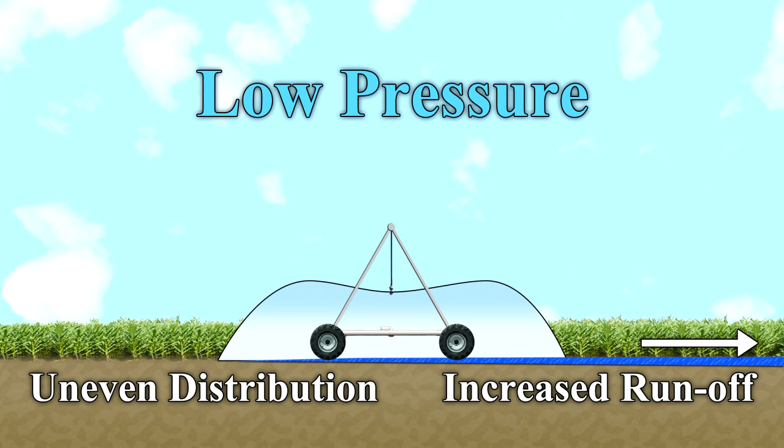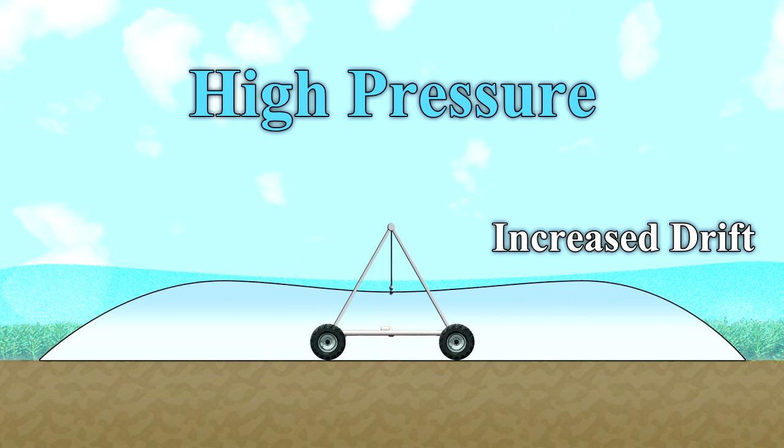There's obviously you've got to have an extra 5 psi, so there's a cost in creating the energy to generate that pressure. But again, that's something we weigh up. In some degrees it depends on how windy it is, because that will change your droplet size depending on what pressure you've got behind it. So there's numbers of layers you've got to look at when making any decision with sprinklers. But one decision you should make is you should have pressure regulators, full stop, doesn't matter what sprinkler you're using.

The use of pressure regulators is only justified in cases where you have topography issues, where you have a big difference in elevation between one part of the system and another, which will eventually affect your application uniformity. In Nebraska, most systems don't need it because most land is flat. So the designer should take that into account when designing and selecting the sprinkler package, and that should take care of it. Only when you have extreme changes in elevation that you cannot take care of in the design itself, then you might have to use a pressure regulator.